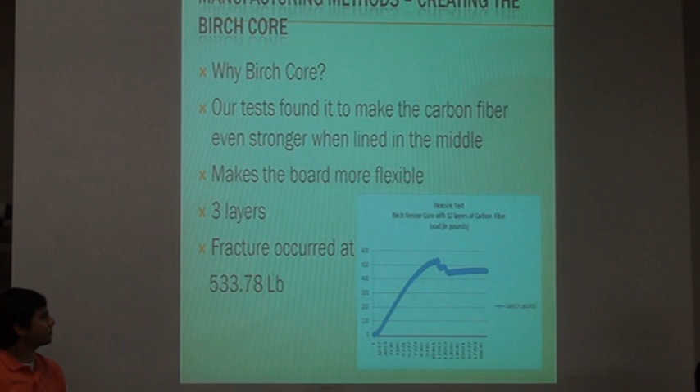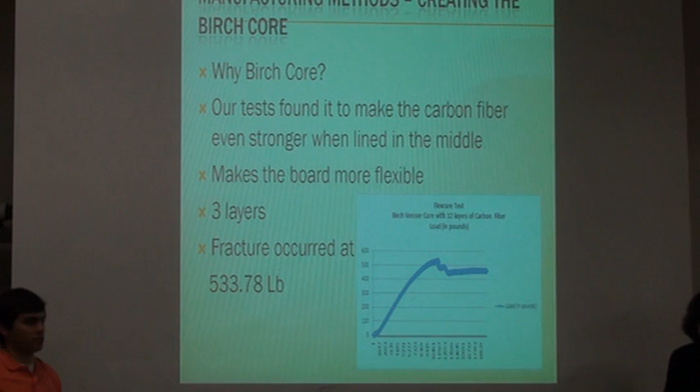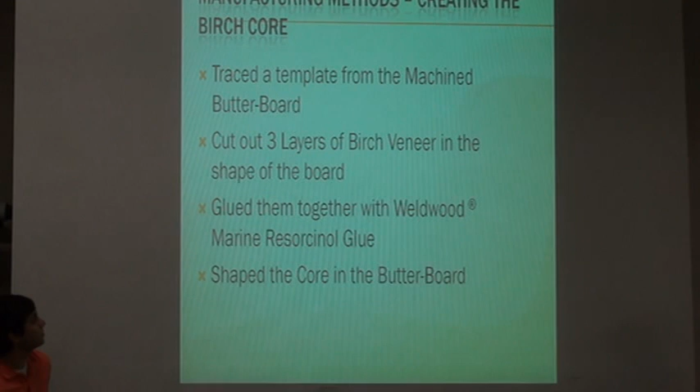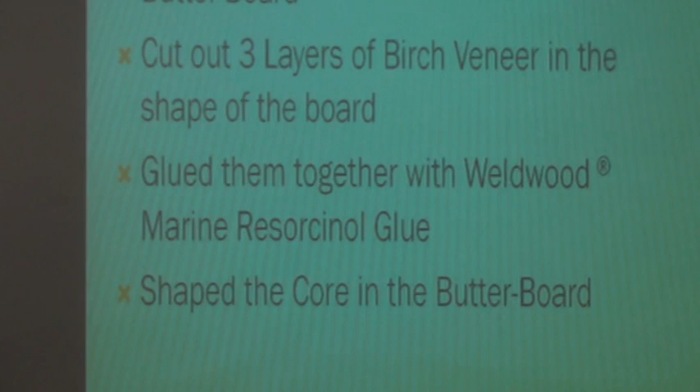So how we created the core was basically we just traced a template on paper in our actual mold so it would be in the shape of the board. We then cut out 3 layers of the birch veneer and then we glued them together with Weldwood, which is a special glue that would help the veneer stick better.

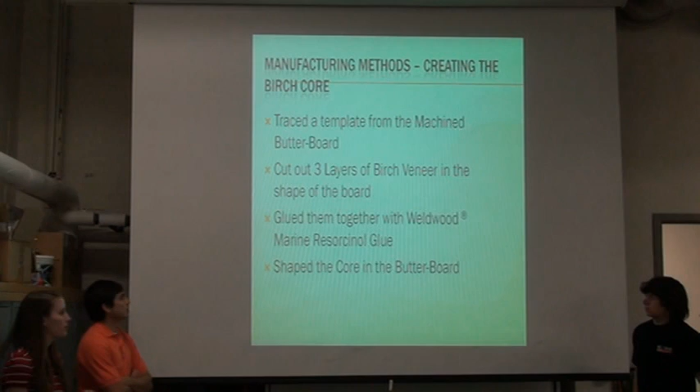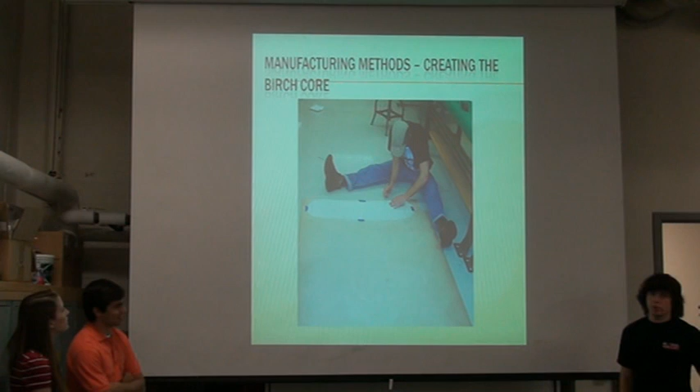And then after that, we laid the 3 layers of the core into the mold again, so it would be in the actual shape of the board, so it would be ready for the carbon fiber. Here are just some pictures of cutting out the board.

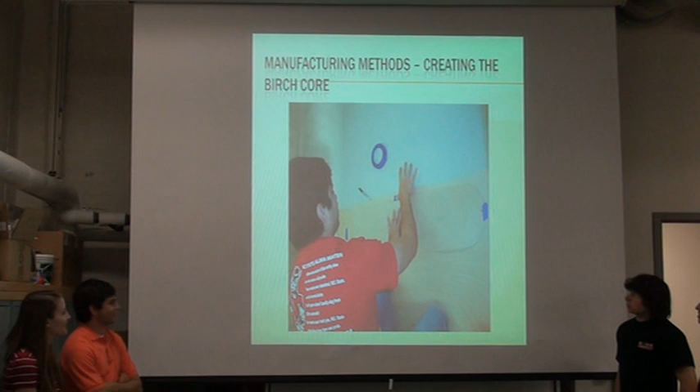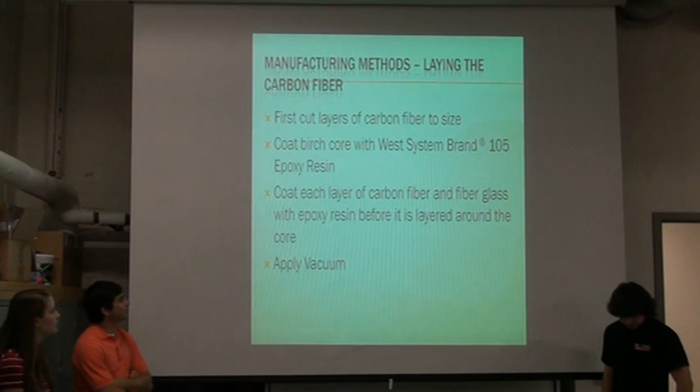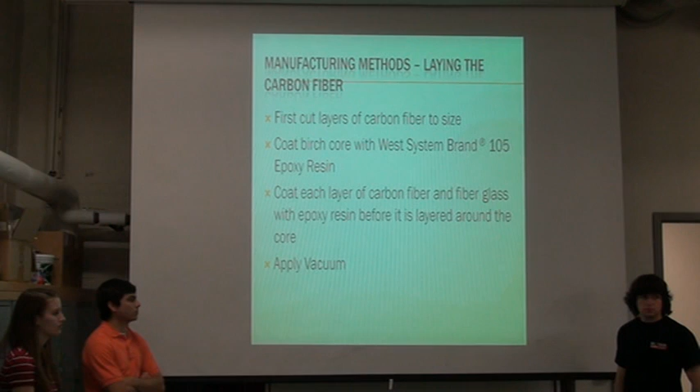Our manufacturing method is laying carbon fiber. First what we did was we cut the carbon fiber to about double the width of our board so that we could layer it over. Then we took the birch core and we coated that with some resin while we coated the actual layers with epoxy resin. So we got those nice and thick with resin on them.

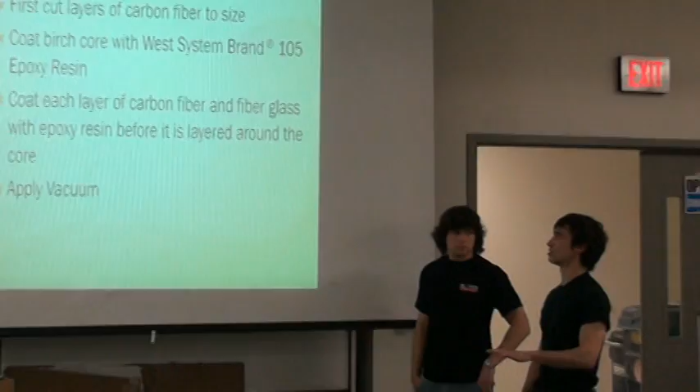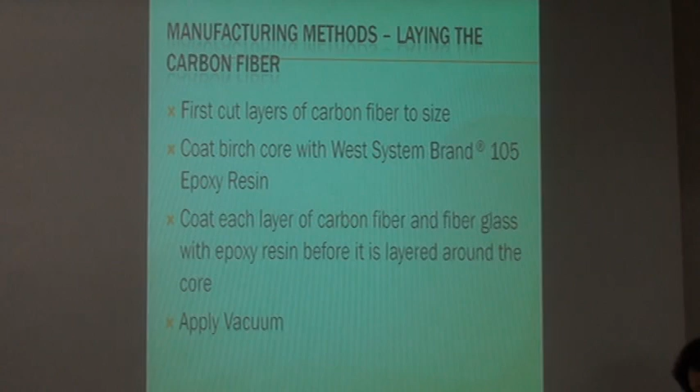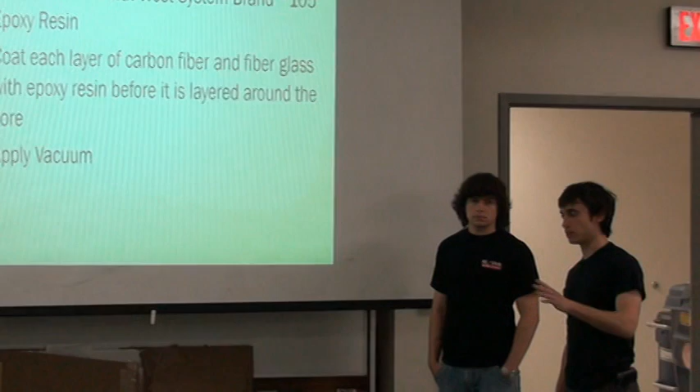And then what we did was we layered all of the carbon fiber first, and then we put the fiberglass on top of that, and then we put the birch core in the middle there, and then we started wrapping them. So after we wrapped them so that it covered everything, we cut the excess carbon fiber and fiberglass around the perimeter of the board,

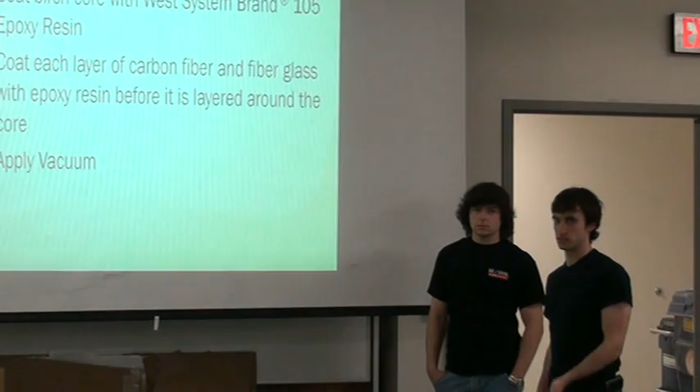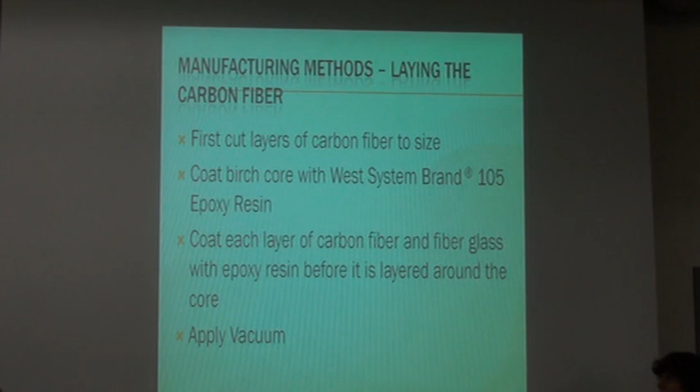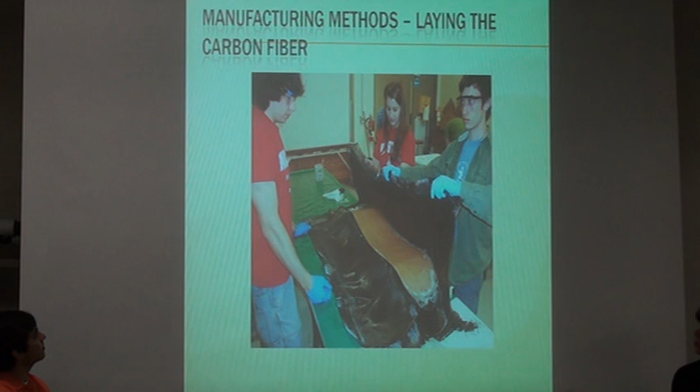and then we set up a system where we applied a vacuum. Vacuum bagging, where we applied a vacuum to suck the excess resin away from the carbon fiber and the fiberglass, and so that allowed it to be more dense and stronger. Here's some pictures of that process. Here's the core. And we're folding over one of the layers there. This is the vacuum.

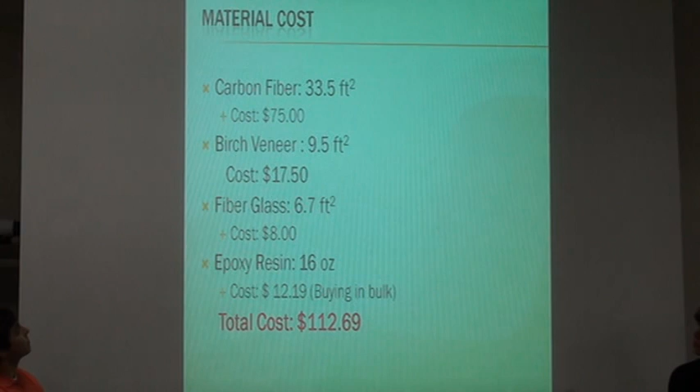So here's our material costs just for this board specifically. First you had the carbon fiber, 33.5 square feet of that we ended up using, and that was about $75. Then the birch veneer, 9.5 square feet, that was $17.50. Then we had, as we said, that 1 layer of fiberglass in the middle along the birch core. So we just had a little bit of that, 6.7 square feet. That was just $8.

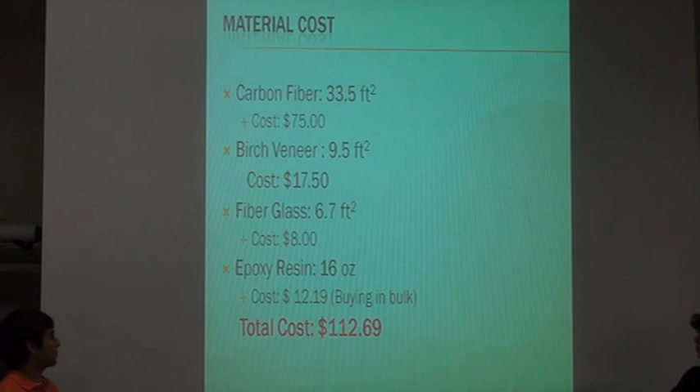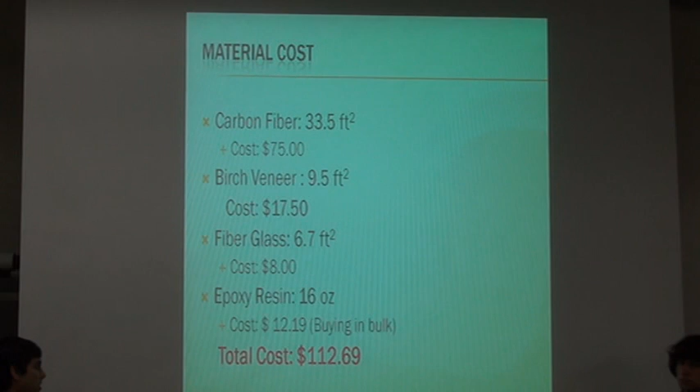And then the actual epoxy resin, which we layered all the layers with. We used about 16 ounces of that. If you buy in bulk, that'll cost you about $12. So the total cost, $112.69 in materials for just this one board.

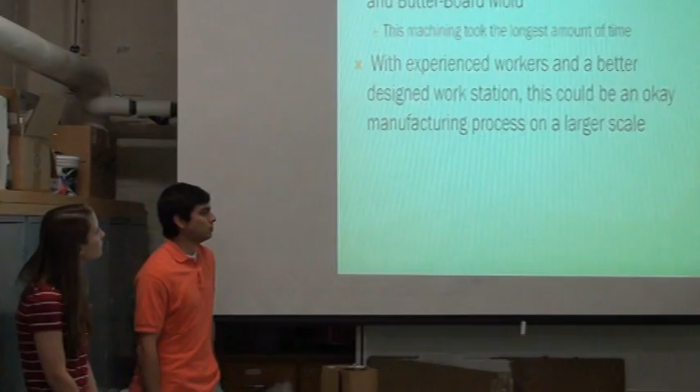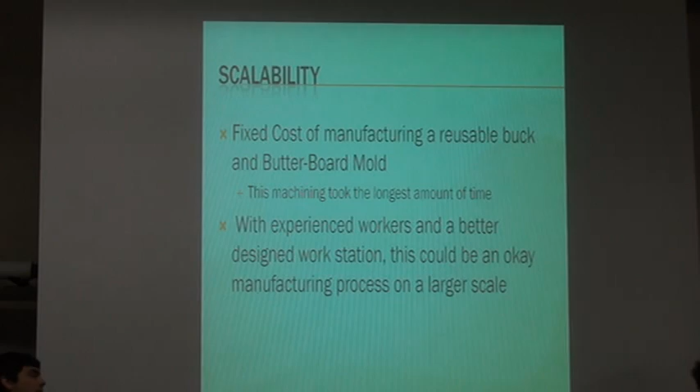So in the end, with the fixed cost of just machining the buck and also the mold base of the butter board, all those can be reused. So that's a one-time incurred cost, and then our final manufacturing process of the layering is pretty easy to replicate.

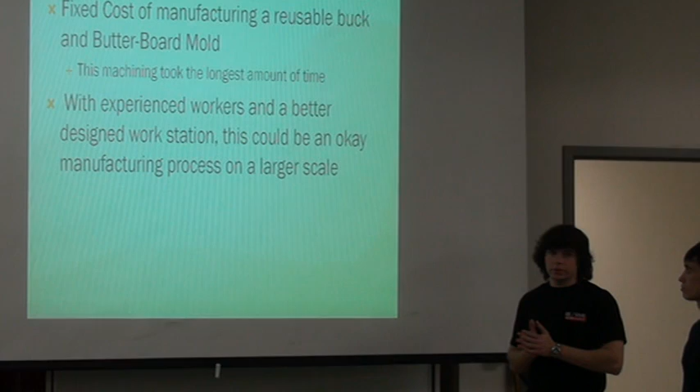Probably the whole process took about 3.5 hours, excluding the vacuum bagging, which you have to keep going for a few hours afterwards. So this can be done on a large scale if you have enough workers.

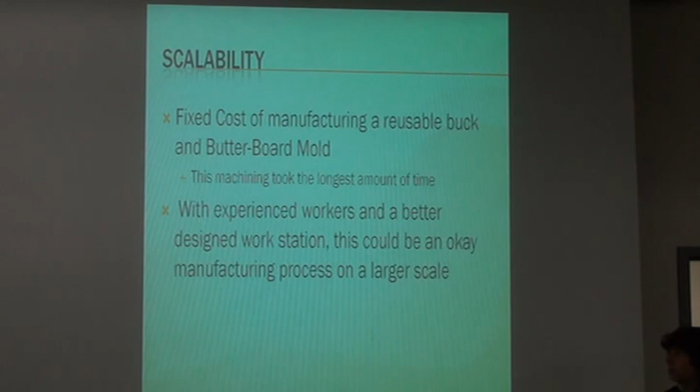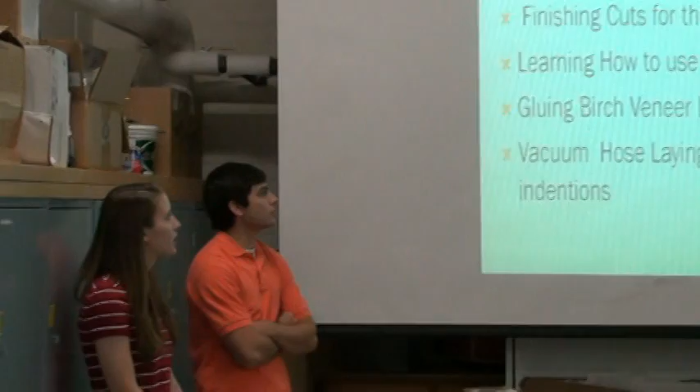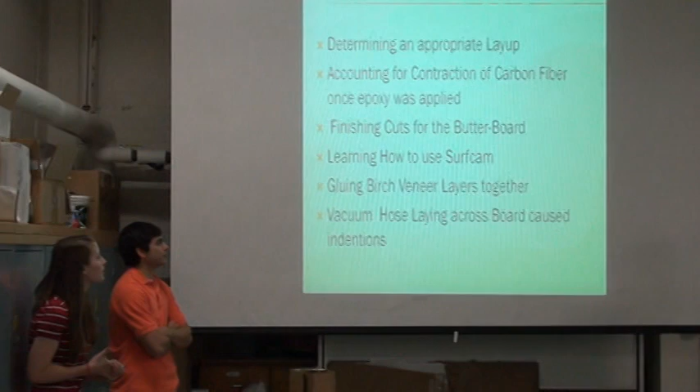Some difficulties that we encountered during this process. First, we had to go through the testing to figure out what the best layup would be. And then also, while we were laying up the carbon fiber, we didn't realize at the beginning that once the epoxy was applied, the carbon fiber actually seemed to shrink in size. So that was a bit of an issue. Then also figuring out the finishing cuts for the butter board, and almost relearning how to use SurfCam.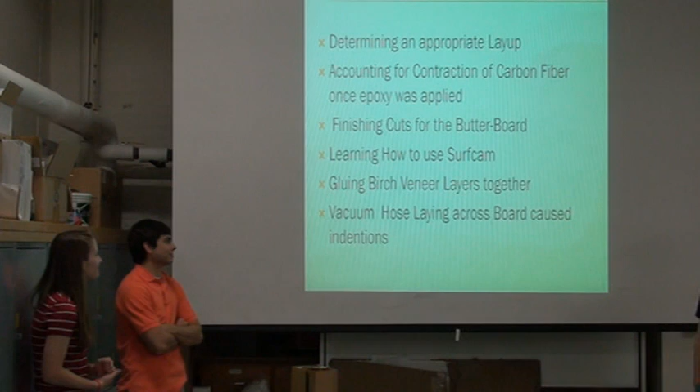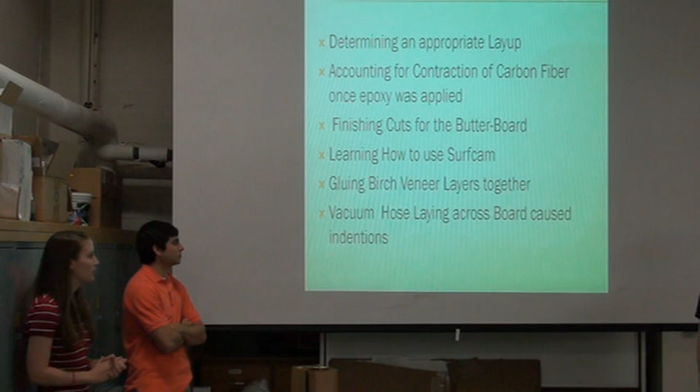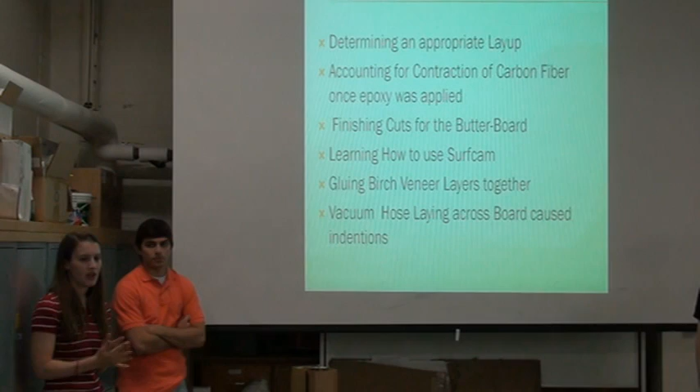And then gluing the birch veneer layers together, we weren't getting the edges glued well enough, so we had to go back and re-glue the edges. And then the vacuum hose caused a problem because it actually made indentations into the board. So we would try to figure out a better way to do that next time if we ever did this again.

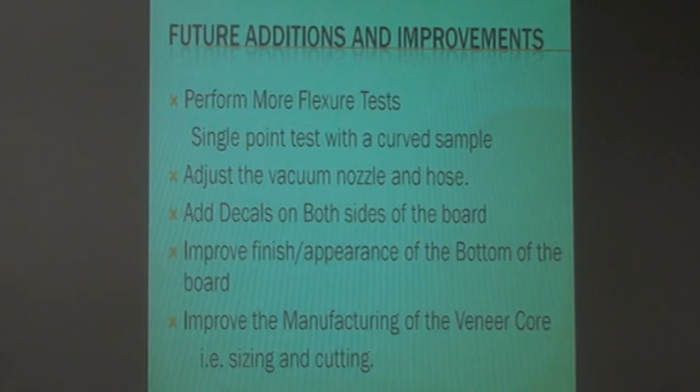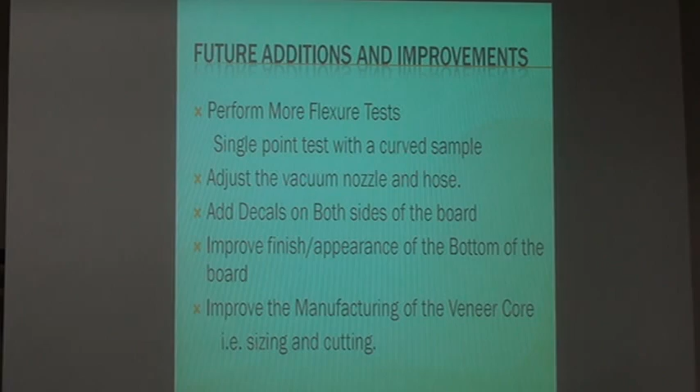So some of our future additions and improvements: we would probably conduct some more flexure tests with curved samples so that we can get single point flexure tests and see, if you're going to jump up and down in the middle of the board, how much weight it can handle. And then again, adjusting the vacuum hose and nozzle, and just making it look better with some decals and whatnot.

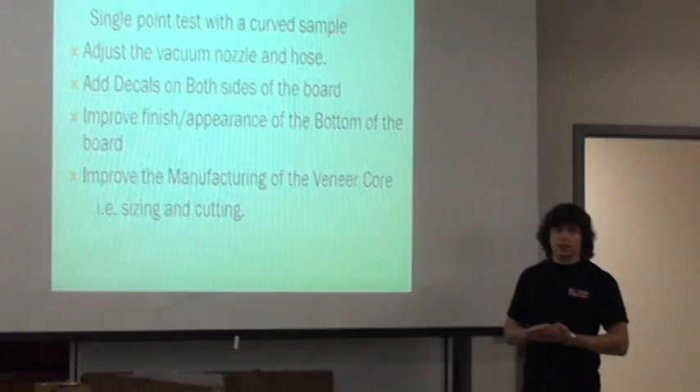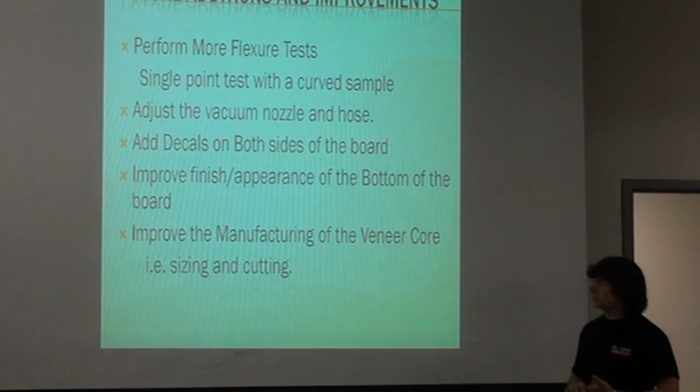And then also improving the finish appearance of the bottom of the board. The vacuum bag, the silicone layer that helps release the resin, doesn't really leave it with a very nice finish. And then just get better at cutting the birch veneer core all around. We had some problems with using the right tools to cut the birch veneer.

And we'd like to thank Jason Lowe, Serrani, Dr. Harvey West, Dan, and also Heath for helping out with the whole project. He wasn't really in our group, but he helped us.